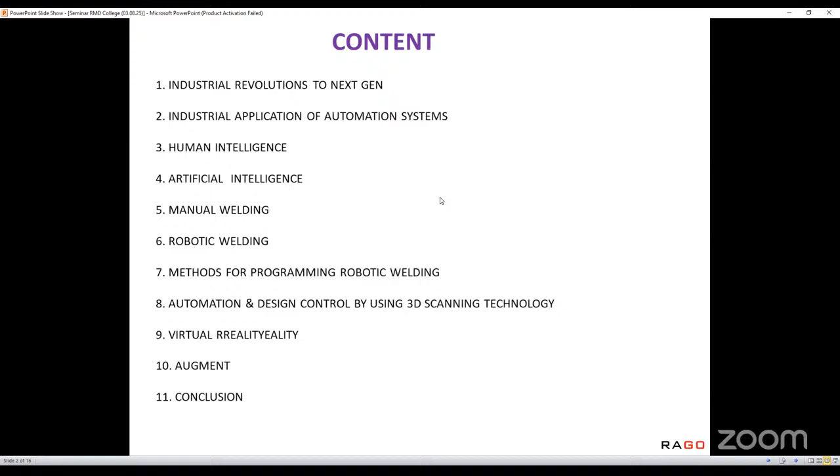Today we will review the content: industrial revolutions to next-gen, industrial applications of automation systems, human intelligence and how it compares with artificial intelligence, manual welding processes versus robotic welding systems, methods for programming robotic welding, automation and design control using 3D scanning technology, virtual reality, and augmented reality.

This is the industrial revolution - how industries revolutionized from the 18th century till date. Initially it was Industry 1.0. During that time, mechanization and water and steam power were established, starting in the 18th century. It means steam power plants, coal-based power plants, and other water resource sectors were established during that period.

The next stage is Industry 2.0. It was innovated and established in the 19th century - mass production. For example, in the automobile industry, manufacturers of cars or motorbikes use what we call mass production. This kind of industry boomed in the 19th century, along with electric power sectors and the assembly line.

Assembly line means a continuous manufacturing system. If you've visited automobile manufacturing industries - manufacturers of cars, trucks, or buses - they have an assembly line, which is a chain-type assembly. Initially one part is manufactured, and multiple parts get onto the conveyor line. Each sub-assembly is assembled at various stages, leading to a complete assembly, and the final stage is the painting area.

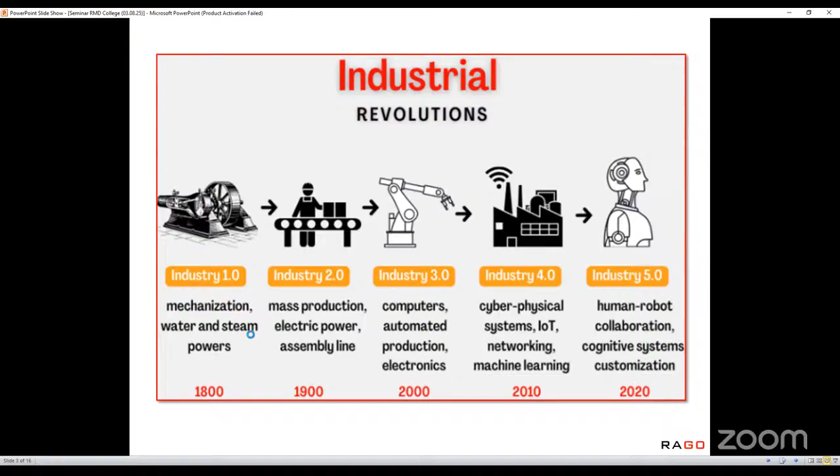Then now we are in Industry 5.0. It is about how we can collaborate with humans and robots, how we can work together effectively, and how we can improve productivity and maintain the quality of the product to reach the goal, along with cognitive system customization. So a little brief.

So here is a detailed breakdown of the industrial versions and transformation, how it transformed from 1.0 to 5.0. In the 18th century, introduction of mechanical production powered by water and steam. This era saw the rise of textile mills, metalworking, and coal mining industries developed and increased.

Industry 2.0 started in the 19th century. This revolution introduced mass production techniques, as I explained before, through electricity and assembly lines.

Then Industry 3.0, this phase emerged around the 2000s, focused on automation through computers and electronic systems. It was also the beginning of globalization, with offshoring of production to lower cost economies. So this is the technology we are following in Industry 3.0.

And Industry 4.0 is characterized by Internet of Things, IoT, how we use the internet, and how that internet helps us develop the manufacturing system.

And then there's artificial intelligence and big data analytics. Data analytics plays a more important role in the organization. For each and every task we have to make data. In that data we have to analyze how we are growing, where we are lagging, and what corrective action needs to be done, how we need to improve the process. For that kind of approach, data analytics is more useful for us.

Just a few things I would like to share. Flexible welding: manual welding has flexibility and adaptability. Skilled welders can easily adapt to changes in geometry, meaning dimension. For example, if we can weld 100 millimeters of length, a human can change that based on practicality to 150 mm or 50 mm, increasing or decreasing the welding length based on criticality or if an error is found during that time.

But a robot cannot change immediately until it has been programmed. If we program it, it can do it, but we cannot expect it to handle errors wherever applicable, adapting to different materials without the need for extensive reprogramming.

Lower initial investment: setting up manual welding equipment generally requires a smaller upfront investment compared to a robotic system. For example, if we need to install or purchase a robot, we have to import the material, get a supplier, and arrange training to operate the robot. We cannot directly operate the robot; we need training for its operation.

Suitability for specific tasks. Manual welding excels in tasks requiring intricate detail, welding in confined spaces, or on parts with irregular shapes. Even in irregular shapes a human can weld, but compare that to a robot.

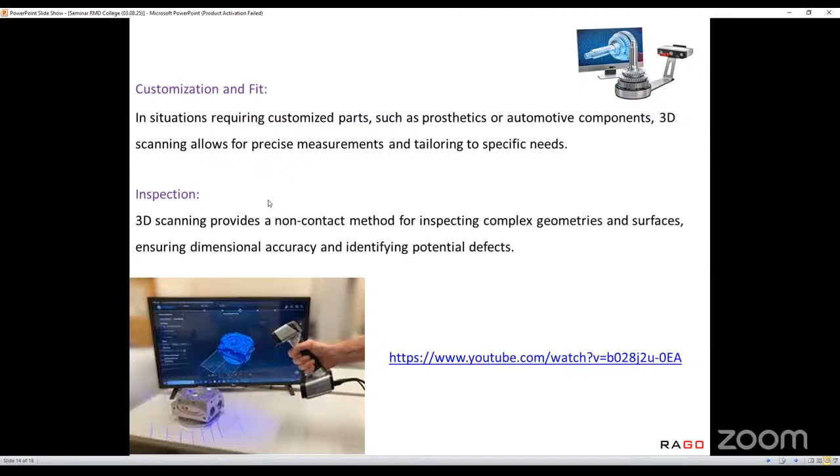For example, if a human has to measure a component, they have to use measuring instruments like a vernier caliper, measuring tapes, or scales, whatever tools are required. They have to physically touch the material and physically take the measurement, which requires additional measuring tools. But with a 3D scanner, you cannot touch the material physically and you do not need a measuring device.

The next one is digital manufacturing - not digital marketing, but digital manufacturing, and then you can market the product. Digital manufacturing is the use of an integrated computer-based system comprised of simulation, 3D visualization, analytics, and collaboration tools to create product and manufacturing process definitions simultaneously.

Virtual reality - hope most of the students know about virtual reality, how we can use computer generated simulation of a three-dimensional image or environment that can be interacted with in a seemingly real or physical way by a person using special electronic equipment, such as a helmet with a screen inside or gloves fitted with sensors.

So this virtual reality is not just a 3D model, but you can feel the realism of how the product would be like before actually manufacturing it. You can imagine how the product would look, how it can move, how it can rotate - that kind of thing you can identify before manufacturing.

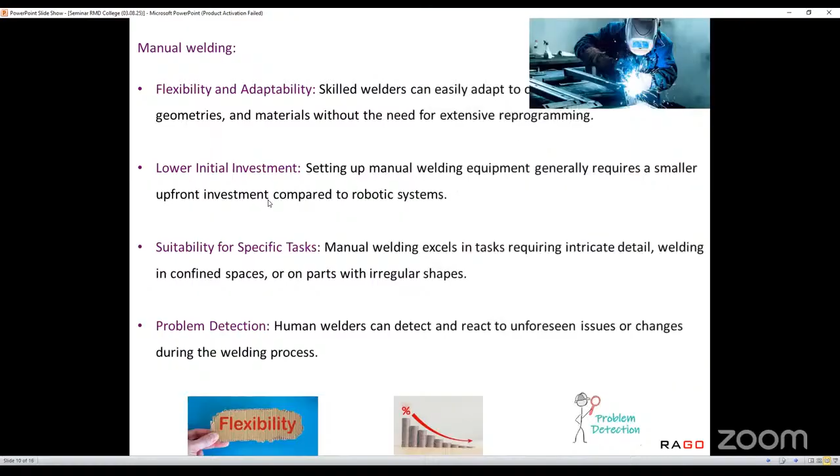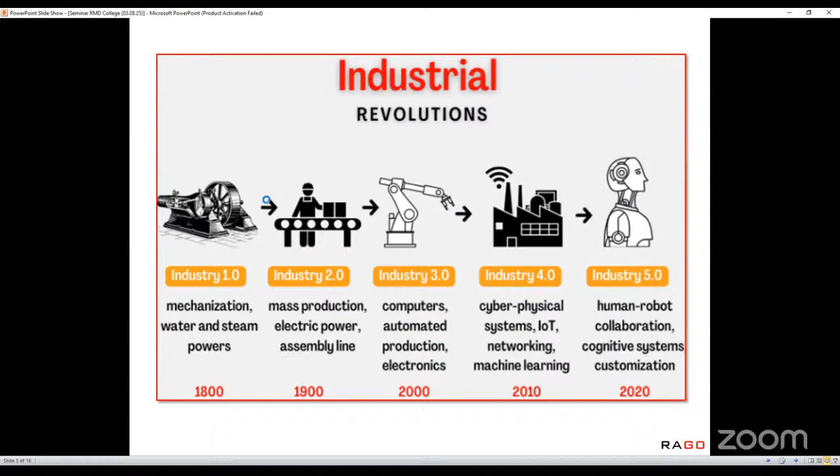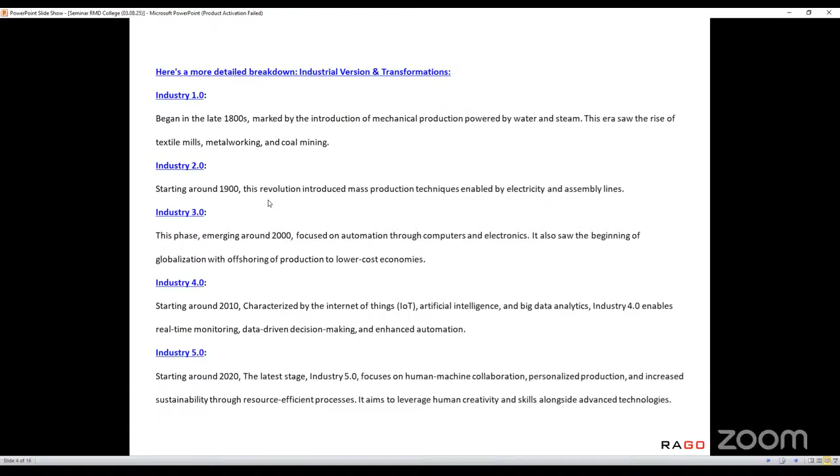So, industrial revolution - I just gave an overview of how it evolved from the 18th century till date. This is the breakdown of what we've seen: Industry 1.0 up to Industry 5.0, how it evolved, and how humans and robots will collaboratively work together in future industry, and the applications of automation systems used in cement or power plants.

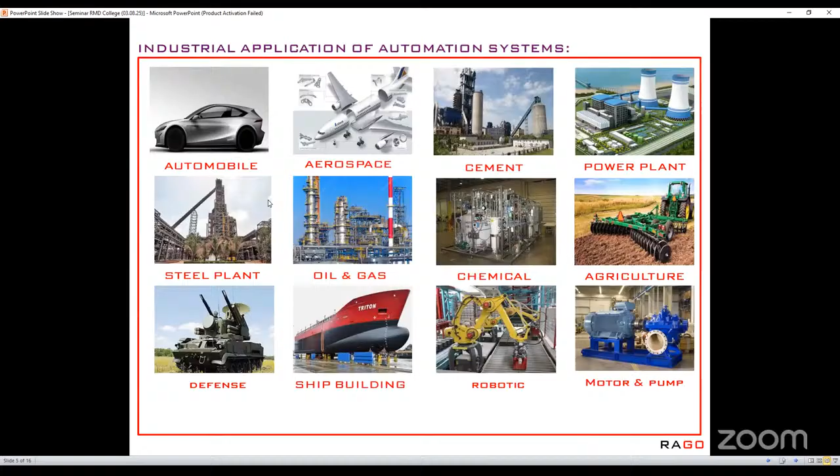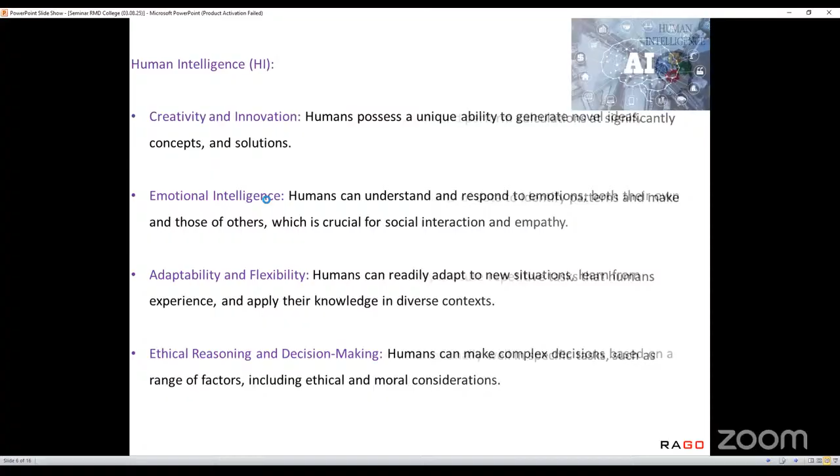And I explained before about human intelligence and its advantages. And I explained about artificial intelligence, its advantages and benefits, and how we can adopt it in the future.

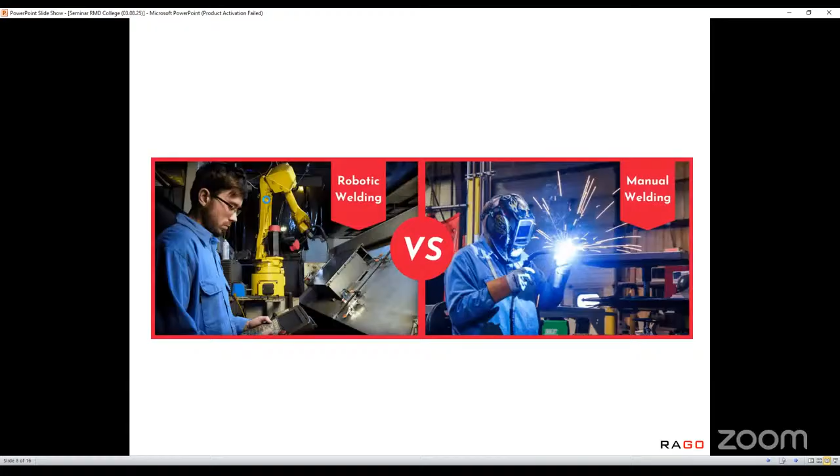Through the welding process, I explained about manual welding and robotic welding, and how robots are able to work. For example, as a mechanical engineer, we have to operate the robot - what needs to be prepared. So nowadays we have to prepare ourselves well in advance before reaching the industry. Their expectation is also that way nowadays.

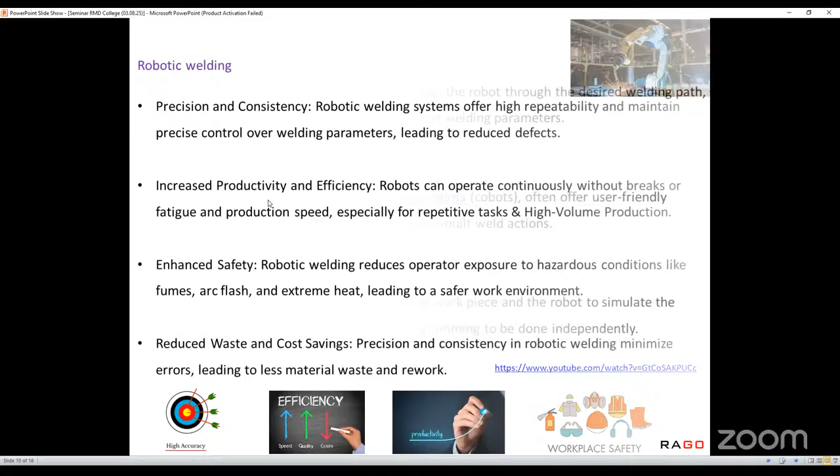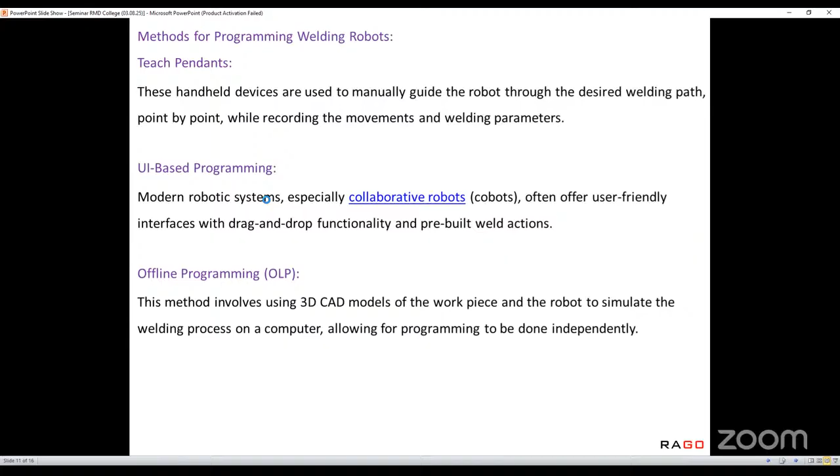So we have to prepare prior to completing the course. We have to learn about additional technology away from the syllabus or subject, whatever it is - industrial oriented programs, methods for programming welding robots. This is a key consideration for programming.

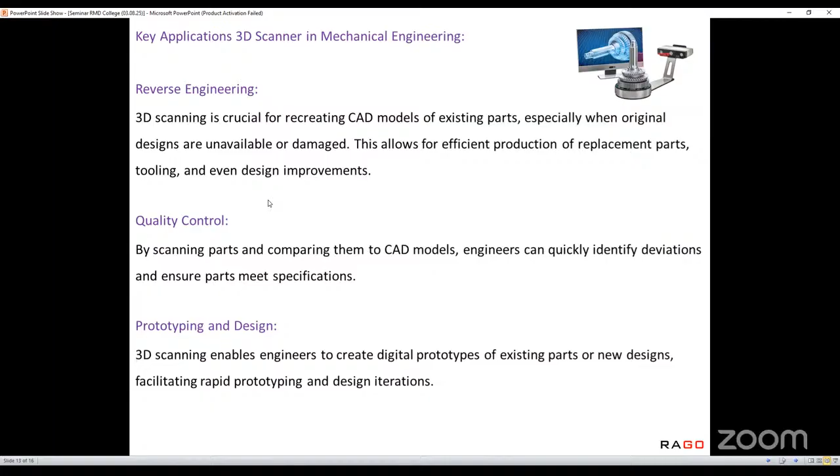Next, I explained about the 3D scanner. The 3D scanner is a very essential technology to adopt in future. So we need to compulsorily learn and know about 3D technology through the academic session.

So these basic things I just explained about virtual reality and augmented reality. The automation system is a very vast subject. I just covered this to share my knowledge with you, to let you know how future industries will be, how we have to prepare ourselves, and how we have to learn many things away from the syllabus or subject to adopt to the industry.

So we have to grow our knowledge during college duration. We have to learn from industrial oriented programs also. That is very important for us.

We are also conducting design training for engineering students through mechanical softwares and design automation training on 3D models and other industrial manufacturing drawings, organizing internship programs for real-time projects, and supporting engineering projects for students. We support internship programs as needed by industries, giving students opportunities to explore their knowledge while sharing our knowledge to encourage them and help them adopt the technology. This is our basic presentation.